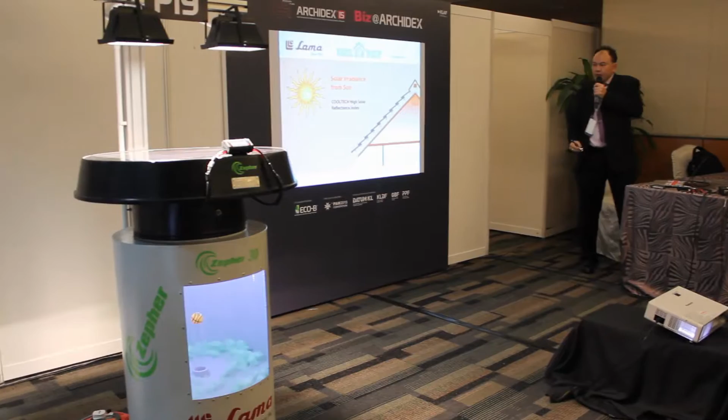But you have radiant heat still coming in. Imagine it's really, really hot and it's really, really uncomfortable. Roofs, right? Why do we say people like black roofs?

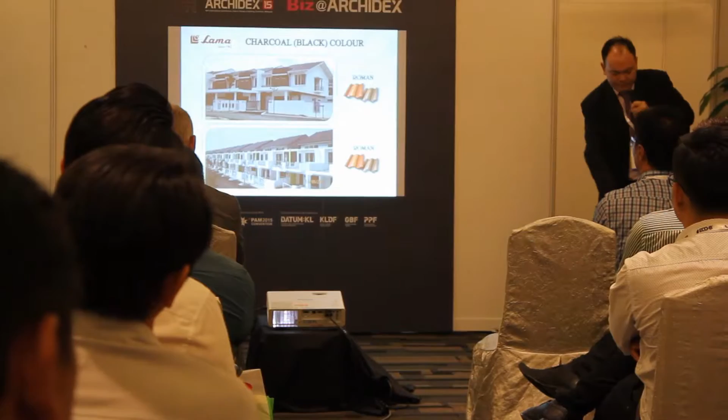Take for example black roofs, right? They're nice, they look classy, professional, modern. More black roofs, very beautiful houses with black roofs. Some contrast with light colored walls as well gives them a really good feeling of design.

But black roofs are hot. How often would you find a cat walking in the middle of the sun on a black roof? Take note the next time, you probably wouldn't find any, right? The roof gets really, really hot, and it heats up really quickly.

We have examples on our booth later on, you can have a look. That goes up to about 70-80 degrees roof surface temperature just from absorbing heat on black roofs.

On our Lama product, we've done some tests with our thermal imager. We found that there is a big difference in temperature between black and light colored roofs. We are looking at something around the 10 to 12 degree temperature mark, a very big difference in temperatures.

Take note, these pictures were taken on roof tiles on a rack, where you get ambient temperature, wind, moving air flowing at the top and the bottom, at the same time cooling down the tiles. So if you were to put these tiles up onto the roof, where the roof space is all sealed out, you will get much higher temperatures than what you see here.

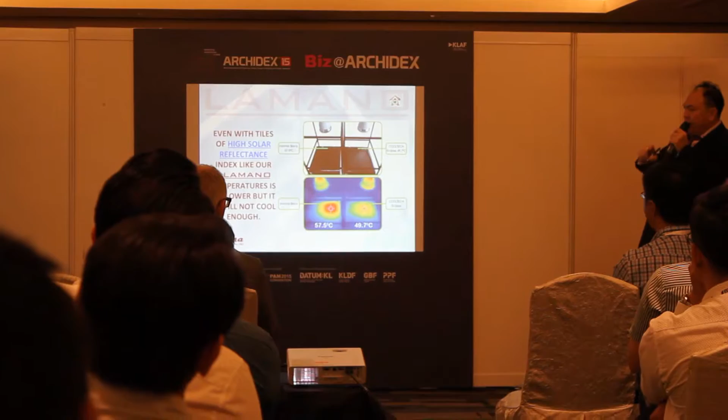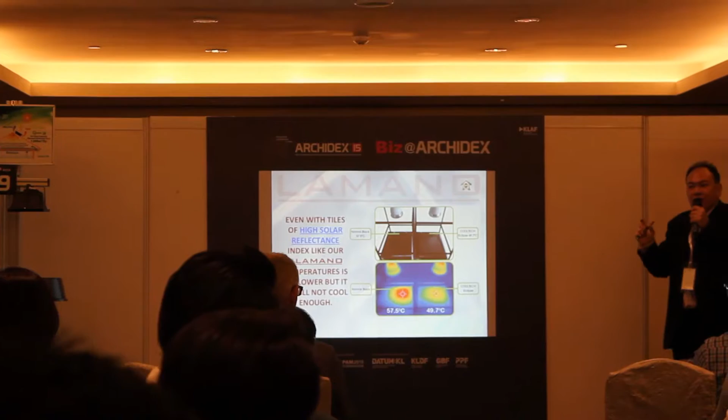We have even tried with high solar reflective colors. On our Lamano tiles, we could only bring temperatures down about 8 degrees, right? But 8 degrees out of something like 57 degrees, it's a lot. It's surface temperature though, not the roof temperature, not your house temperature, so the difference actually comes down to only a few degrees. So it's not really good enough, you have a cooler roof, but it's not really that cool.

So here we have the solution for a lot of developers and your home. You can have a black roof which is not so hot. The solution is going Zepher. So here we have a product that relies on sun energy to remove heat.

As we know, the sun is the one that causes anything to get hot. So we now have a product where the sun works really hard, and the Zepher works even harder to remove the hot air. This part I would leave to Brad later on to explain how everything goes, how the flow goes, and how it's calculated, as in how many Zephers and what sort of temperature differences you would expect.

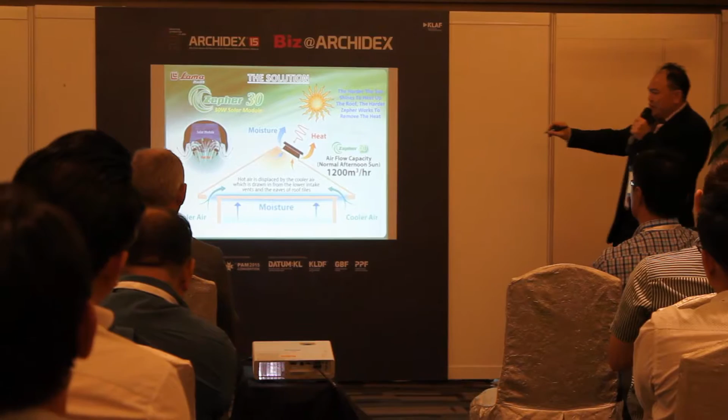But what we are trying to mention here, moisture, renewable fresh air, healthy living, okay, can be attained by Zepher.

If you need a bigger solution, you've got a house with black roofs, really, really hot, right? You can go for the Zepher 50, which is a 50-watt solar module with much more flow. Previously, on the Zepher 30, which is a 30-watt module, you only have 1,200 meter cube per hour of air movement, but on this one, you have airflow of 1,500.

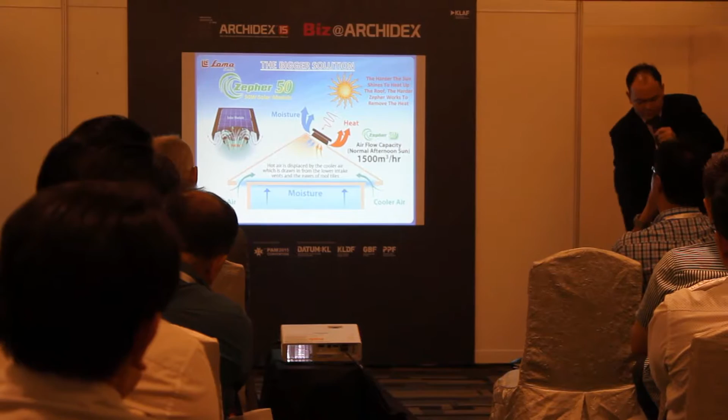So you have architects, developers, homeowners, now you can be assured that your black roofs or dark colored roofs would no longer be a big issue. But again, if you have an existing roof of a different color, the Zepher can also bring the temperatures down as well.

Now, what are the benefits on residential having a cooler roof system like a Zepher? You have a huge reduction in your cooling cost, right? It's rather subjective how much you can save. Let's take, for example, we did a rough calculation: if you had 2 air cons and switched them on for 5 hours a day, especially when we sleep, given the cost of electricity in Malaysia, you'd probably end up getting your money back in about 2 years, right?

But again, most houses are air conditioned nowadays, right? So with the Zepher, you actually save money because you feel the same in the house. When you go home, you set the aircon to 22 to 23 degrees. The thermostat adjusts the temperature down to that level. You won't feel the difference with the Zepher on. But the difference is your aircon compressor doesn't need to kickstart that often.

You know sometimes when you have aircon and all of a sudden you get dimming of the light, that's where the compressor kicks on and draws current. You end up saving energy and electricity costs with the Zepher.

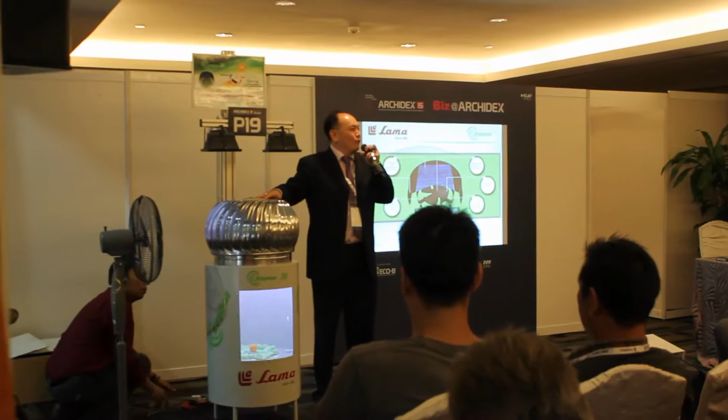Make the Zepher spin, but before he does that, can I have a volunteer with very good fingers to spin this? Can I have a volunteer here who's really strong? This gentleman over here, he's actually really shy. You know, he's Gary as well. So Gary, hi Gary, I'm Gary.

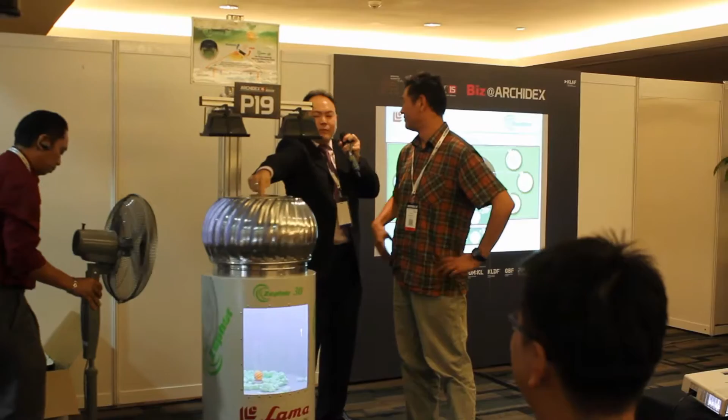Now, can you spin this? Right, this is how the turbine spins. Put your fingers and spin it as fast as you can.

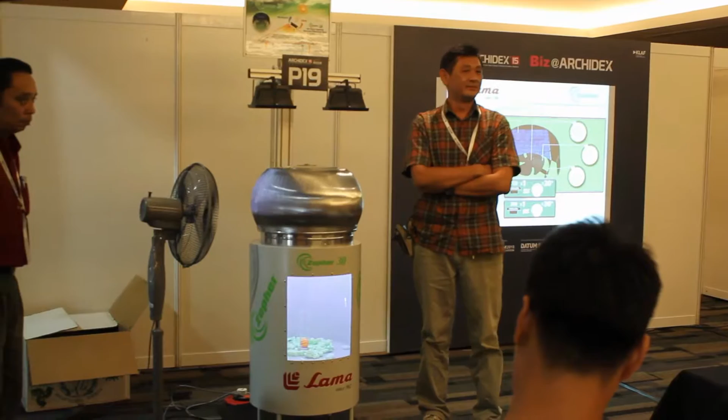Now, some people may say, oh, he's spinning it, but this thing needs wind to move. So David, give it wind. As long as don't come up with a tornado like Dumont.

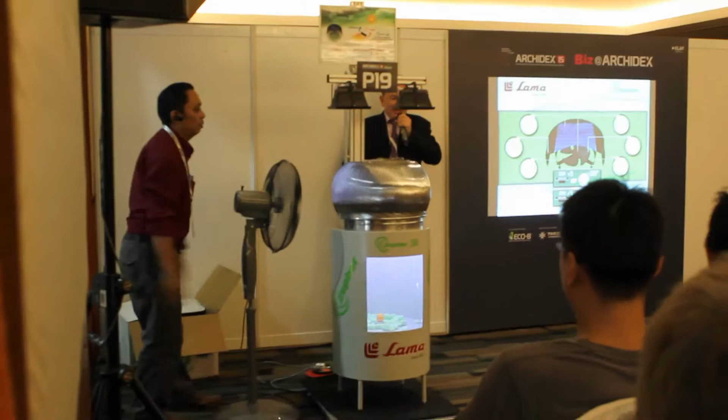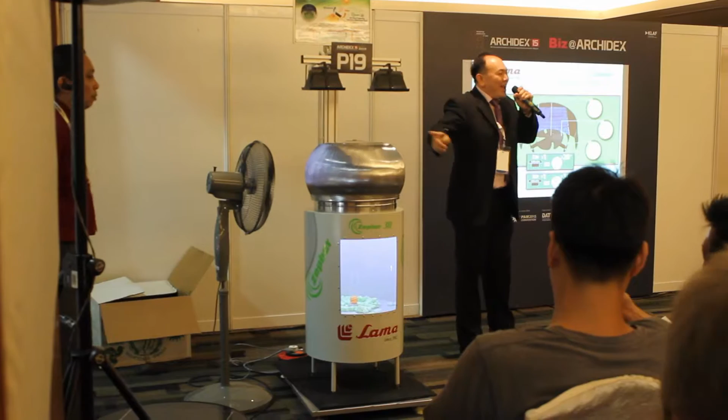Alright, let's see. Okay, it looks like it's slower with wind. So we have a product which is spinning fast, but it's really not doing anything. Who has this in his house? Anyone have this at home?

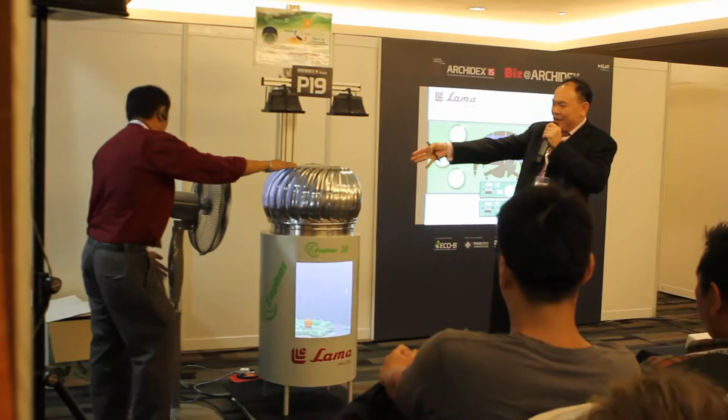Now, can we have the Zephyr onto it? So what we have done with this flow bench setup is put two spotlights to simulate sunlight. Now, the ironic part with these spotlights is solar panels don't work with LED lights. They don't. You can put big LEDs in it, just not going to generate any power. LED gives light, so that tells you that sunlight and LED lights are different.

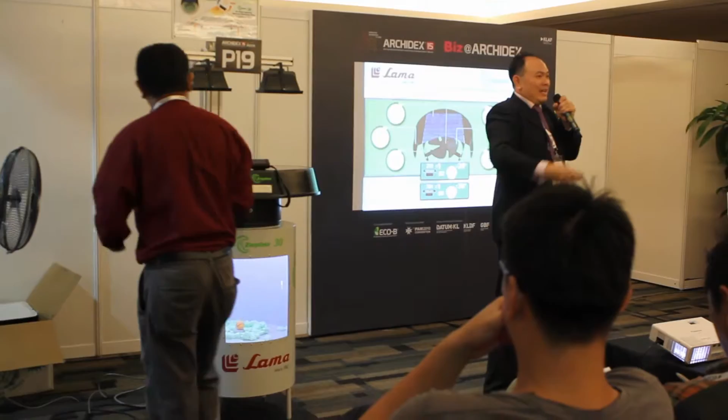Okay, so we have the normal old school spotlights, and this is a 30-watt panel, right? This is a 30-watt panel. On a normal afternoon, you would get maybe 20 to 25 because we do have clouds up there blocking some sunlight.

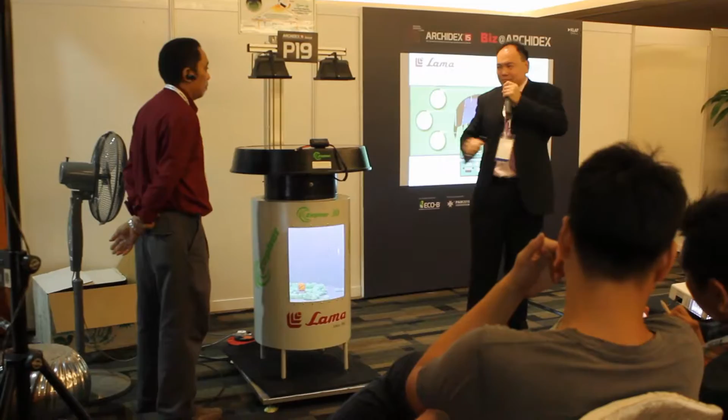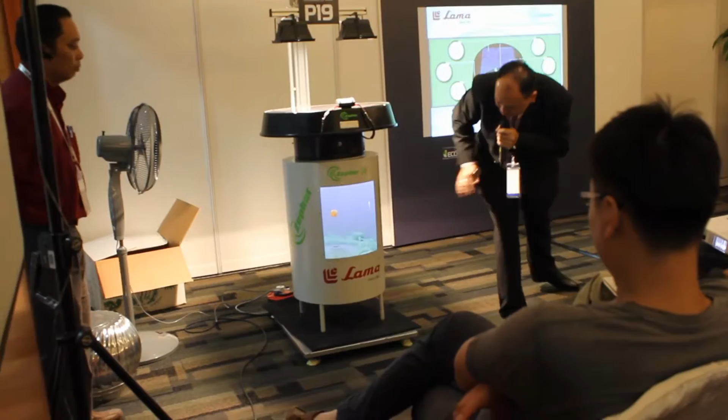So we'll switch this on, right? And we see what it does and how many watts it's producing. Okay, it's connected, right? So you can actually see the amount of vortex it's producing and the amount of vacuum it's creating, able to suck the ping pong ball up on the tube, right?

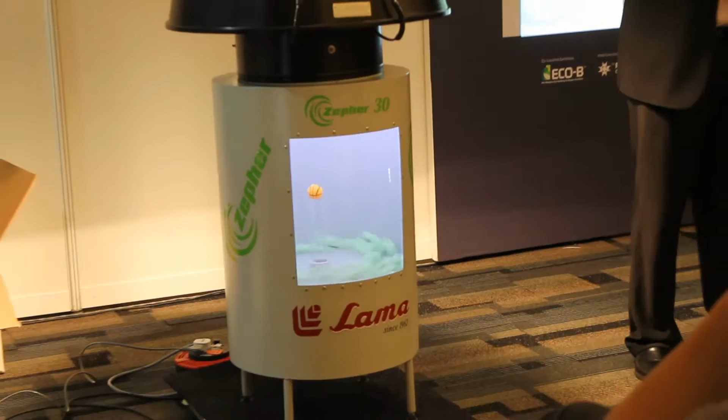Now the thing is, how many watts is this? This thing is capable of 30 watts, we have a 50-watt unit. How many watts is it producing to be able to create this effect, which you see, wow, it's more than a turbine. Can we have one interesting member, let's say Mr. Casey Ong? Could you come up to the stand and read out to the consumers how many watts this is producing? They won't believe me otherwise.

Yes, Mr. Ong, thank you very much. It's my pleasure. You're very welcome.

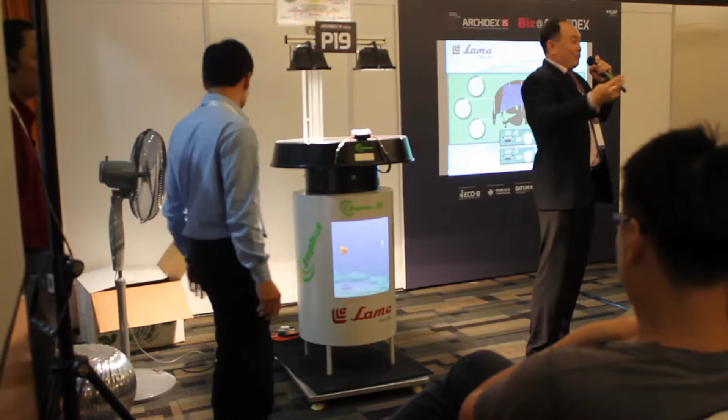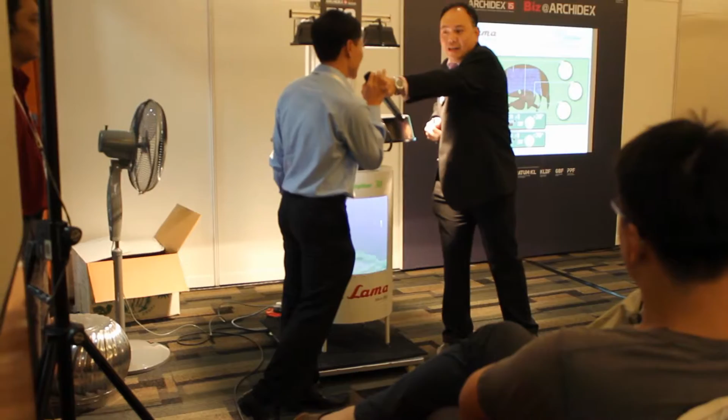Now, this is what we call a watt meter. We all know, engineers will know, watt is energy, right, equals ampere multiplied by voltage. If I put an ammeter or voltmeter, you will have different amperage on it, right? So it's really hard to tell how many watts it's producing. So this calculates it, can you read out the one with the W, how many watts it's producing? Yeah, the one with the W. 11 watt. Okay, so thank you very much, Mr. Casey. So now you have 11 watts producing this.

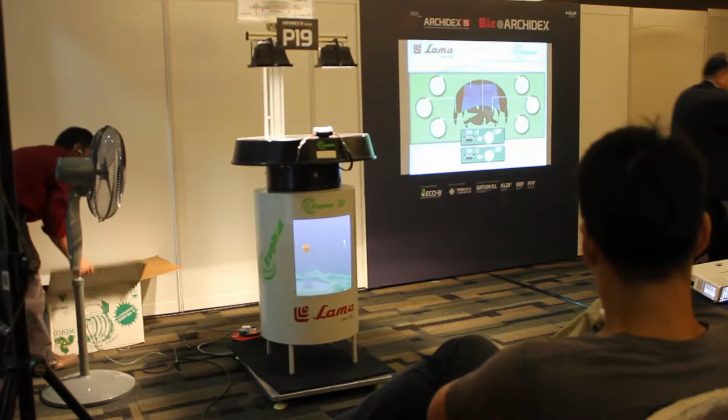Out in the sun, you will have like 20 plus watts. So what happens when you have like 30 watts? Can we give it 30 watts? Can somebody give it 30 watts? Oh yes, so I'll need another candidate to feed it 30 watts or maybe 30 plus watts. Can I have a skeptic? Someone who doesn't really believe that it's working.

You're a skeptic? No, sorry, Mr. Henry. Who is Mr. Henry? Mr. Henry, thank you very much for coming. Right? Okay, so now it's producing 11 watts. This should produce about 30 plus watts, right? So can David show how Mr. Henry can give it 30 watts?

Right, 30 watts. Now it's nothing. He's going to feed it. No, let him plug it in. Let him plug it in, right? And see what happens to it.

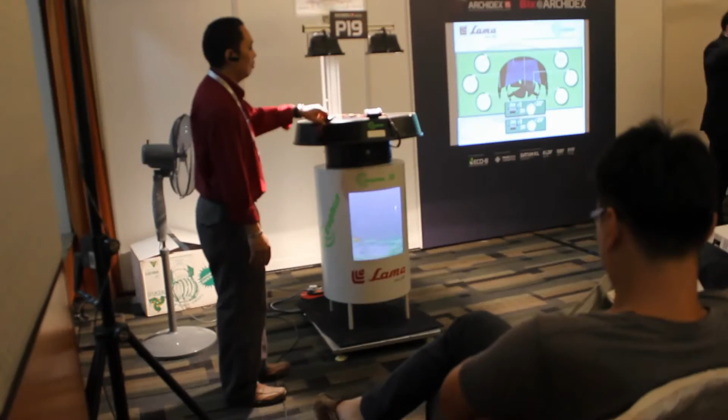Alright, so this is 30 watt, the effect of 30 watts. And how many watts is it producing? 34, 34 watts, right? This is the effect of 34 watts. The ping pong ball is almost... spoke too soon, the ping pong ball has gone up, right? Thank you very much, Mr. Henry. So this is the effects of Zepher, right? It's something that really works and really sucks hot air out from the roof.

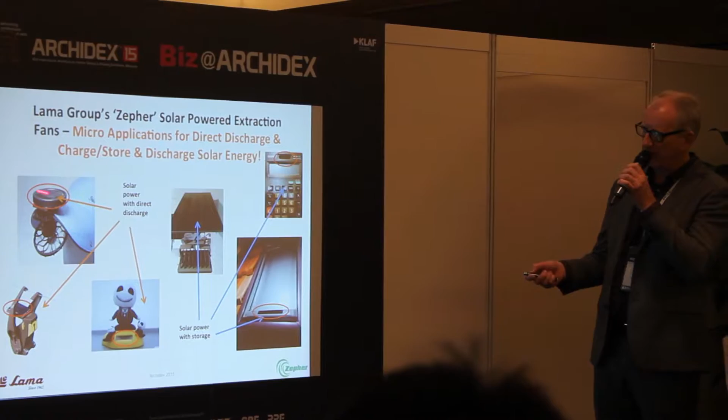So we have a little tiny solar panel here, and it gathers energy and discharges immediately to the little fan sitting right on your cap. Same with the little monkey here that runs along the wire. This is a very simple use of solar energy: solar panel discharging immediately, the energy goes to the little toy, and the toy runs along the wire.

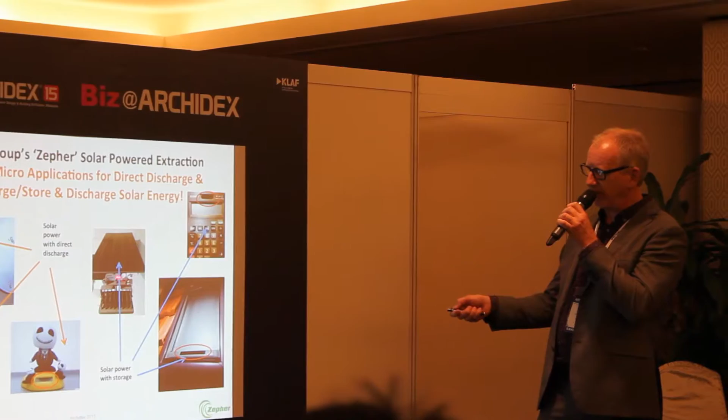On this side, we have solar power that is stored. Here we have a solar panel that stores energy during daylight hours, and during the evening it's a clever device. Once the charging cycle is finished, as soon as the device senses charging from the sun is complete, it begins discharging immediately to this light. It's a solar-powered security light. So you put it on the front of your factory or your house or your car garage, charge all day, discharge all night. Once again, a very effective use of solar energy.

So here we have direct discharge, here we have charge and store, and of course, on your calculator on your office bench you have this device. Very small solar panel, we call this one of the older solar technologies, called amorphous silicon. It's a very simple little grey cell that can use something as simple as light, like the lights in your office, to give enough energy to charge this. You use your calculator anytime you want, the energy is stored and it discharges.

My company in Australia, we do a lot of lighthouse or research station houses. These houses can run for 3 days from 1 day's charging with a 1200 amp hour battery. We have a complete control system here, converting the DC energy, because solar panels produce DC energy, direct current, and the control system converts that to AC energy from the battery and back into the property when people are cooking or using the lights or their computer or whatever. So this is an example of charge, store and discharge.

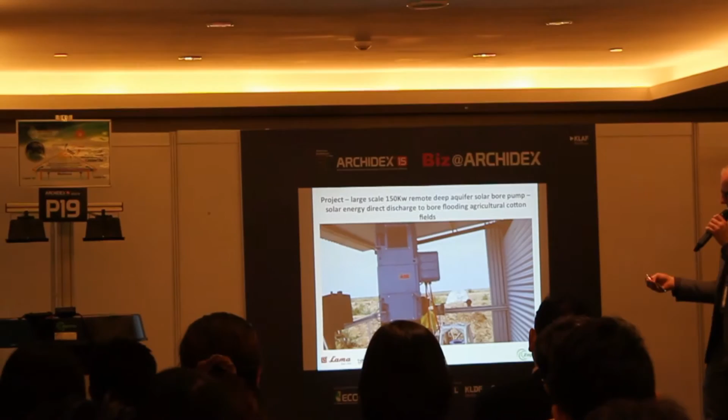So we have a water license in Australia - you need a license to pump water. We have a water license for about 2 gigalitres of water a year on this remote site. So we use solar power, harness the energy, pump the water, and directly discharge to the agricultural application.

The Zephyr is exactly that - a smaller scale of what we've just seen. We have solar energy captured on the top of the Zephyr. It directly discharges to the fan, which is an electromagnetic fan. It's a brushless fan with a packed stainless bearing, so it has virtually no friction. It drives the fan blade and effectively extracts the hot air out of the roof.

The problem here that we're solving is the superheating of the roof. It doesn't matter where you live - if you live in a hot environment, your roof will superheat. We're doing a lot of things beneath the ceiling to try and keep this environment cool. But if up in the roof we've got 70, 80 degrees Celsius because of the superheating cycle, it gets harder and harder. So what the Zephyr does is address the superheating cycle in the roof space.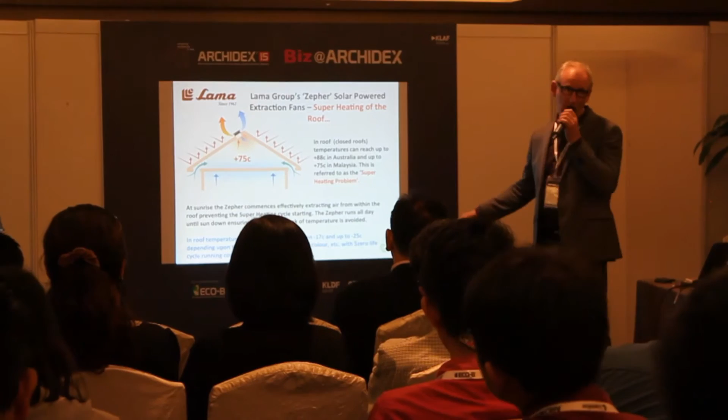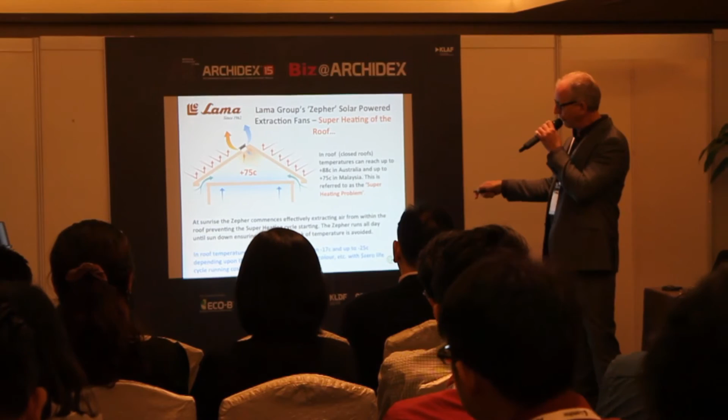In Malaysia, we estimate somewhere between 65 and 75 degrees in the roof space. In Australia, we get up to 90 degrees in the roof space. All that is between you and that high temperature is some gypsum board. So what you need to do is keep that air circulating, removing the superheating cycle from the beginning of the day to the end, so that the air never sits there long enough to superheat. It remains cool.

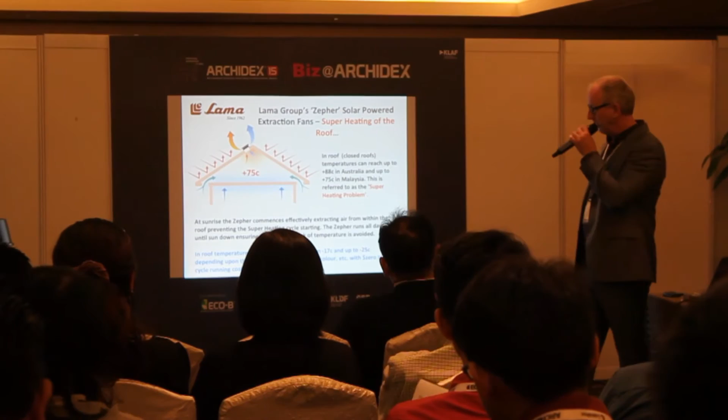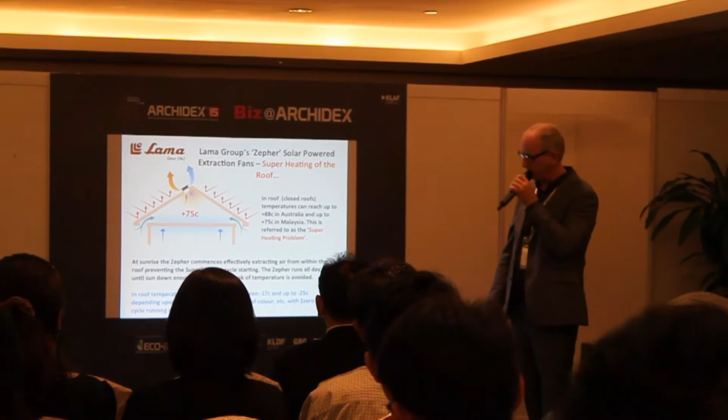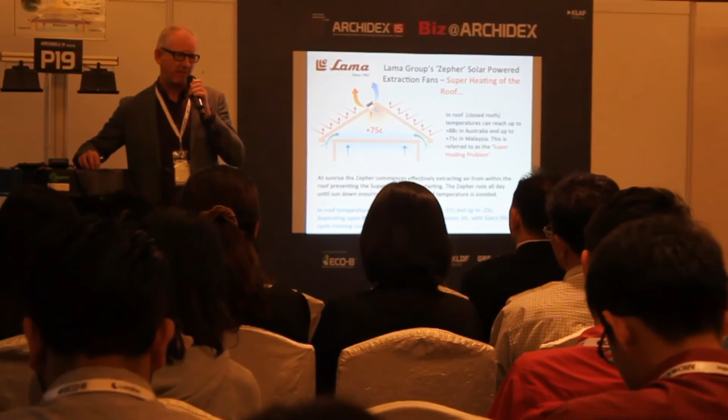We're talking sunrise till sunset, horizon to horizon, with no ongoing cost at all. There is absolutely a zero cost operating profile to this product. The useful life of the solar module on the Zepher, we think, is around 25 to 30 years - it's a long life. The module on the Zepher is a monocrystalline module. We have around 3 different commonly used solar technologies: polycrystalline, monocrystalline, and amorphous silicon.